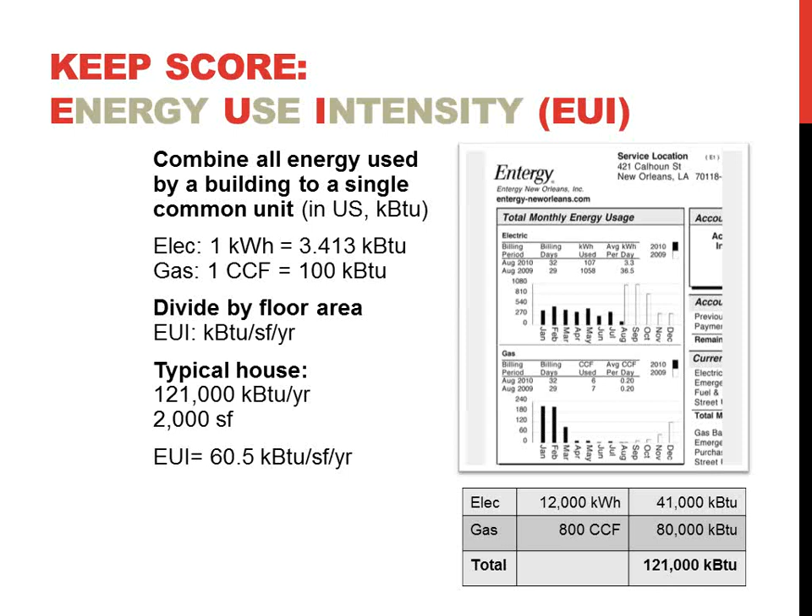Just to go over some scary numbers at the beginning: an EUI tries to find a way—if you have a house with an electric bill, the average American household uses 12,000 kilowatt hours of electricity and 800 CCF of gas—how do you talk about how much energy it uses in total? You convert gas to BTUs and electricity to BTUs, then divide by the floor area of a 2,000 square foot house, and you get 60 kilo-BTUs per square foot per year. That metric is the gold standard; it does violence to some of the subtleties of architecture, but it's a good way to keep track.

And this is the 2030 commitment that says we're going to take 2003 as our baseline, and whatever the average was of all from the government survey of, say, multifamily residential or single-family residential or offices, this is the average energy use per square foot.

This is nationwide. In some cases, when there's enough of that kind of building, you can slice it and dice it - so I just want to talk about buildings in the Northwest, or buildings in hot humid climates.

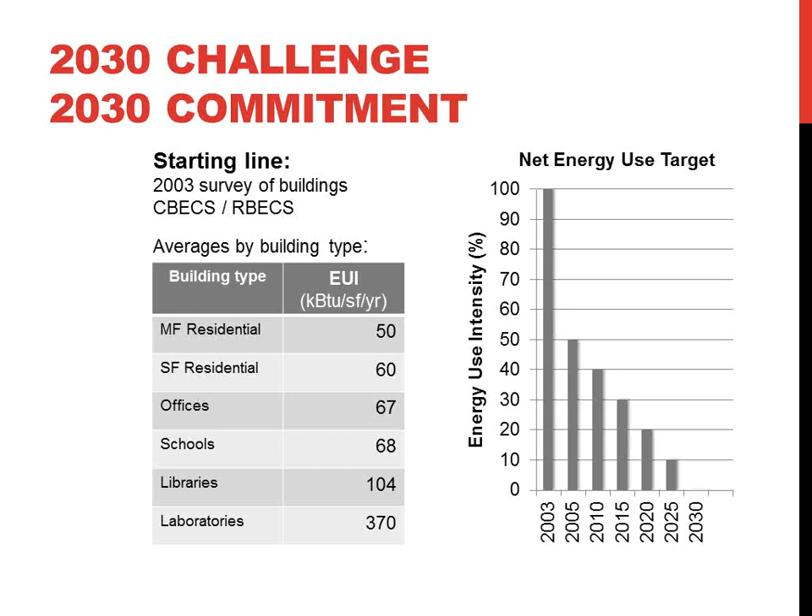When we look at a building that didn't perform as well as we hoped, we have to sort of say, and now we know why.

So how do we get there? Well, the recent budget battles go on unresolved in Washington, but we all know that if you're trying to balance, you can either raise revenue or cut spending. And the only ways to get to zero, to get into balance, is to do all of one or some of both, and so on. So the same thing's true, obviously, for buildings.

We can either make buildings more efficient, or we can generate more power. We can have a Hummer and cover it with solar panels, or we can try to make a building that's so tight on its energy use that it only needs 1 or 2 solar panels, and so on.

This is my own house. This is an 1880 shotgun Camelback, as the local folks call it. Camelback means it pops up on the second floor due to an eccentricity of the tax code where you were taxed by how many stories your building was at the street. So everybody built the second floor 30 feet back, and so the buildings have Camelbacks. Anyway, it's a 2,000 square foot, 4-bedroom house.

And when we moved in, we took data for a year, and we got a HERS rating, the Home Energy Rating System score. 100 means if you build to current building code with recommended levels of insulation, efficiency, and so on, you get a score of 100. Our house had a score of 188, and we spent $1,900 a year on utilities.

For a series of insulation and upgrading the heating and cooling system, which we did not to save energy, we did it entirely because the coldest winter I ever experienced was in New Orleans. I've lived in San Francisco, I've lived in Ashland, Wisconsin, I've lived in Canada, but the coldest winter I experienced was here, because we live in denial better than anybody else. We have to live where we live, right? So we're in denial that we ever have winter. So when it's 30 degrees out, people have these wussy heating systems that have no concept of how to actually make a place comfortable.

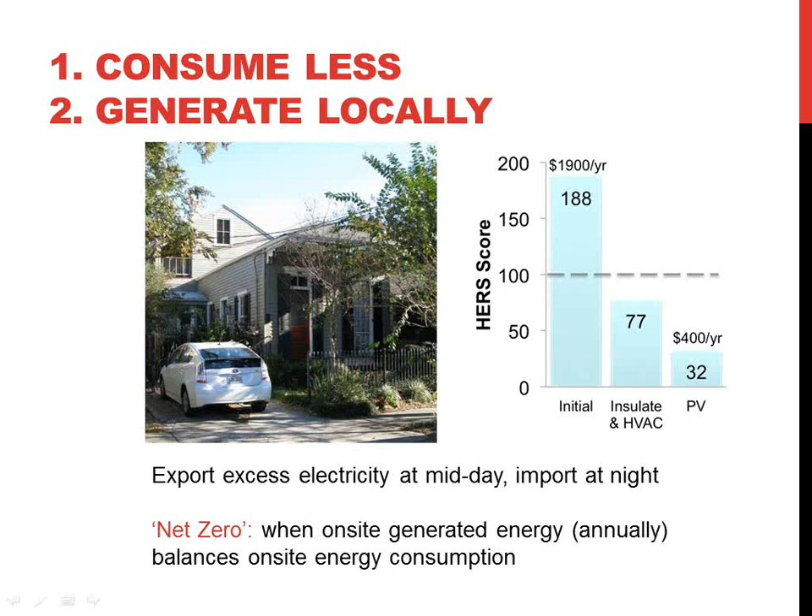And so that net is how we get towards net zero. True net zero is when those two things balance out.

If we say that a typical today's solar panel can generate in a year—you put a square foot solar panel on the roof of a building, it'll depend which one you bought and which angle it's at a little bit—but more or less, you'll collect about 30 kilowatt hours from that square foot of solar panel. Convert kilowatt hours into kBTUs, since that's the units we like to use for everything else. It's about 3.4 times that, so it's about 100 kBTU per square foot per year.

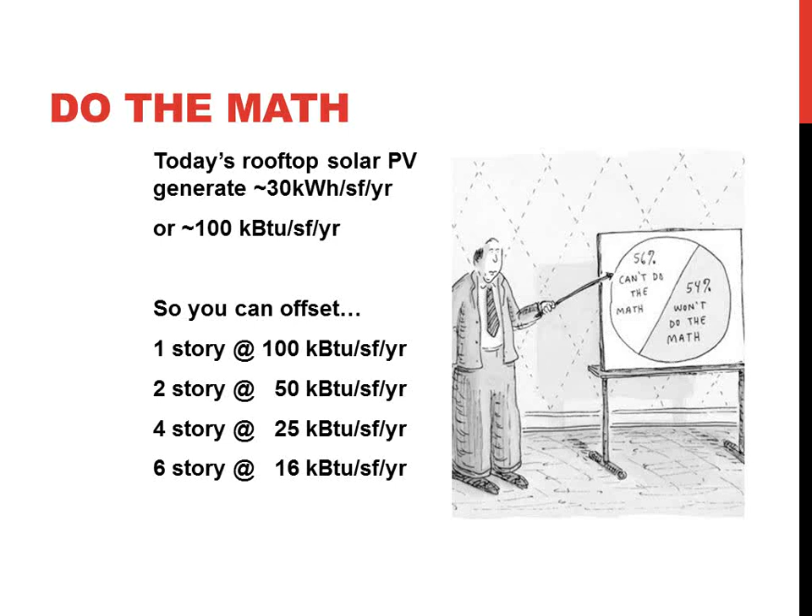Because in the end, the Bullitt Foundation made an interesting choice. This ground floor was supposed to be, of course, a Starbucks—it's Seattle, right, it's supposed to be a coffee shop. I'm sure it's actually going to be a little bit silly, I didn't know that they could grow coffee there, but it was going to be a cafe.

But the problem is the highest energy use per square foot of any building type tracked in the CBECS database is fast food retail, because of the intensity of all that stuff going on all day long. So they said, gee, if we put a cafe down here it's going to blow our energy budget, and we've run out of room for solar panels. So they said no, that's going to be office, because otherwise we can't get to net zero running all this stuff. And now, urbanistically, that ought to be a cafe, right?

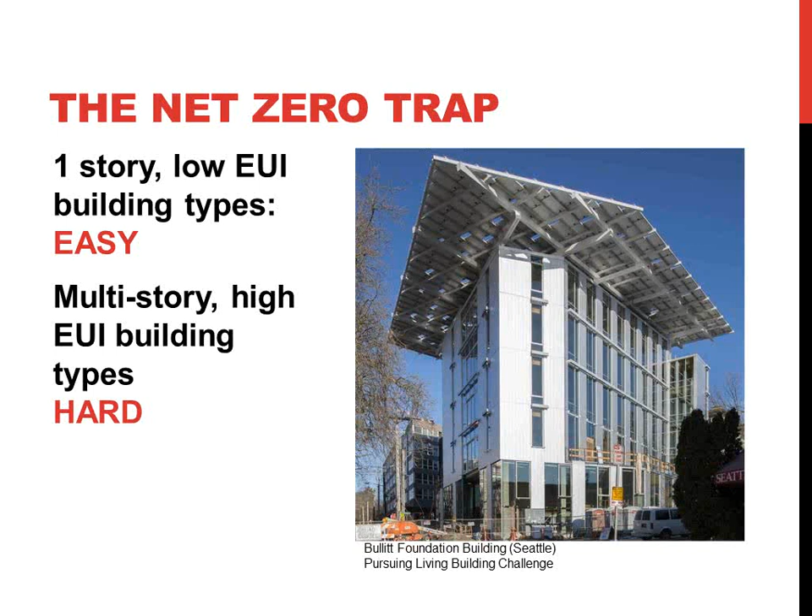So renewables, though, the good news is they're coming on strong. If I keep this track—there's this thing called the log law of learning.

If you take rats and stick them in a maze and time them, again and again, what happens is for every factor of 10 more times they've done it, or factor of 2, it's a logarithmic function. They keep learning, and what they progressively learn is less and less. You have to plot it on a log chart.

That's true not just of how rats learn mazes. It's also true of how we learn to do anything. Take the price of chicken eggs in constant dollars from 1920 to 2000 - it falls 2% per year. That comes from us learning how to be progressively less nice to our chickens, chicken batteries, but it's technology marching on, people figuring out how to squeeze out little bits of performance because learning happens. Learning happens in manufacturing.

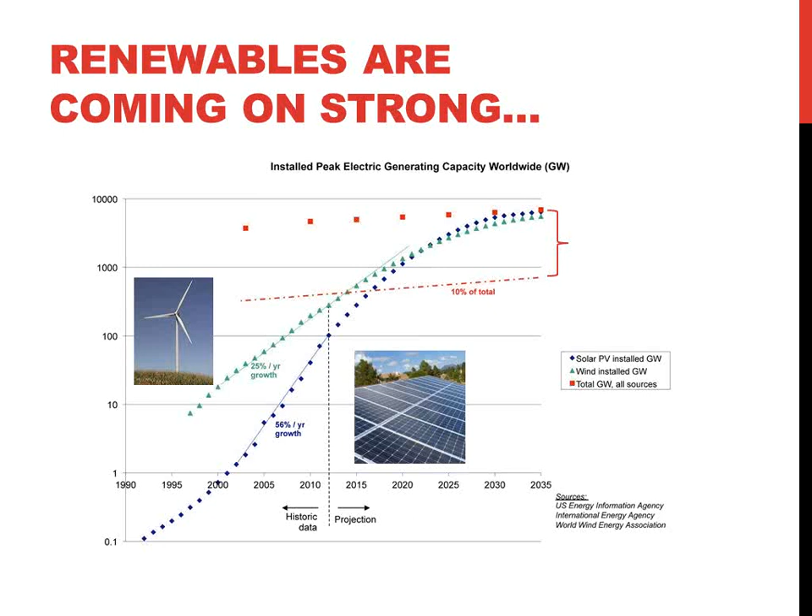The interesting thing is the technology at the end has nothing to do with the technology at the start. You can't predict which technology will win. You just know that someone will run in with their lab coat on and say, I have the breakthrough, and the little man will say, oh good, we were waiting for you. Here's where your next data point comes.

In my previous life I was a physicist, and I worked at RCA Labs on these amorphous solar cells. We got to the point where I did some thermodynamic calculations and said this technology is going to top out at about 15%. I wasn't sure I wanted to spend the next 30 years of my life in that lab, so I let someone else have that fun and went to do something else, which turned out to be architecture 2 years later. But the technology marches on - new technology is happening. There are now solar cells getting 44%, converting 44% of the sun's light into electricity. So there's amazing progress happening, but it does take decades.

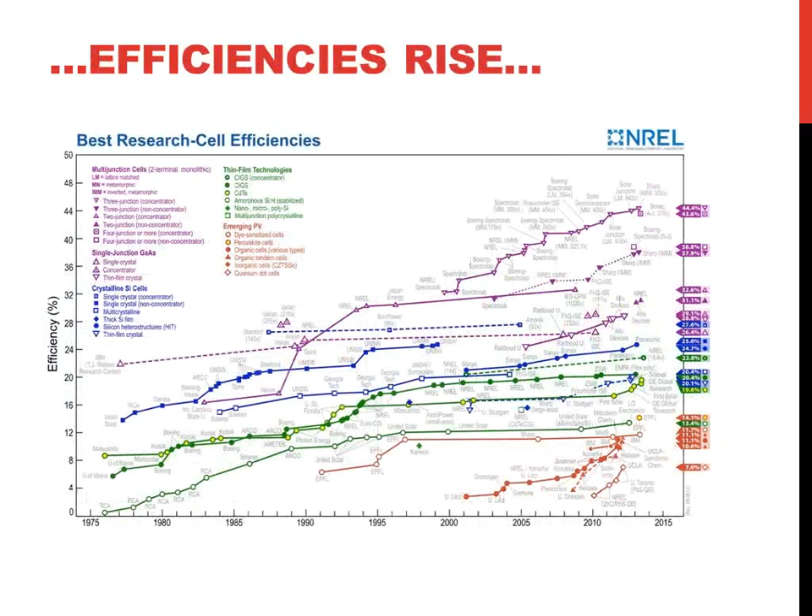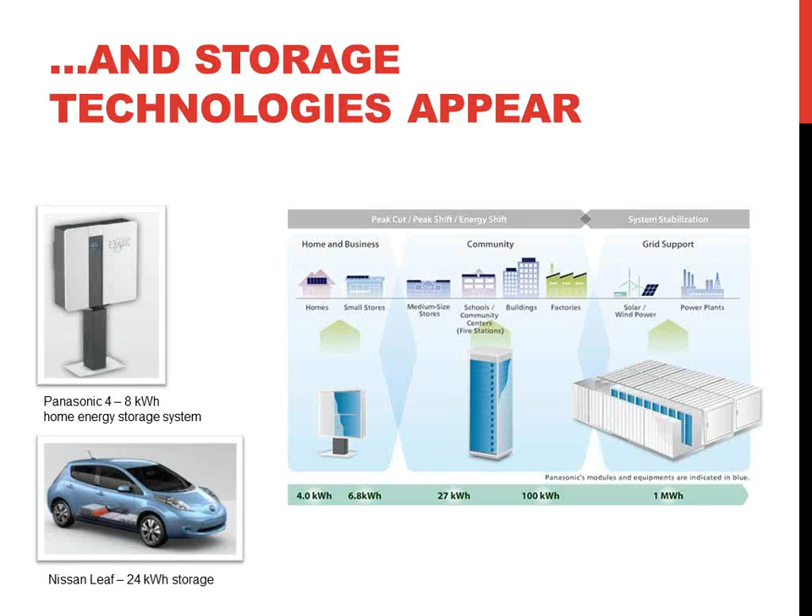Now Panasonic has started selling in Japan and in Germany. This is a little widget that sits in your utility closet, and it's a 4 to 8 kilowatt-hour electricity storage system. So this is a lot easier to scale, putting this in a lot of places. They're also building banks for power plants just to provide more grid stability. But as this system starts to mix with these solar panels, we're going to see some interesting things happen. Again, it's not about making it autonomous, it's about making it really smart here.

And so in some sense, as designers, what we're trying to move towards is this notion of: start out, yes, make it less bad, then yes, get to net zero. Well, we want projects to be regenerative. We want them to take a site and make it better than it was before we got it.

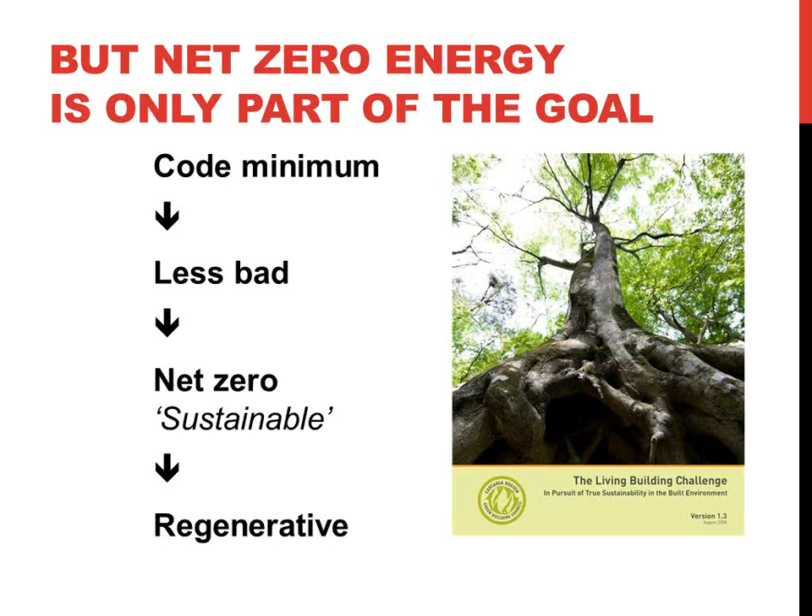More comment? Yeah, we're having a little bit of trouble on the webinar with the sound. Just stay in one place, in one area. Will that help? I move around a lot too when I talk, but okay. Right here? From here to this, is this the safe zone? That would be good. Okay, yeah, I'll be safe.

Okay, thank you. So with that setting, we're now ready for the main course, the research building, the Center for Interactive Research on Sustainability. So this project was first conceived by the director at UBC, Dr. John Robinson, in 2000. By the time the project had come to my hands in 2008, it was the third iteration.

The first two iterations, they tried to build a kind of consortium between 5 universities - some of them, you know what you do for a living. And the problem is they all had conflicting goals, and who's going to get credit, and what's going to happen, and all this stuff. And finally, the third time around, one of the major donors said, if you don't start building within a year, we're just pulling our chunk of change back out.

So they said, okay, we'll build it at the UBC campus. So it changed sites, and they gave the project to me. And they said, okay, this is all you have to do, Steve: it has to be a living lab that accelerates sustainability, it has to be a healthy place to work, it has to be net zero energy.

It has to be carbon negative in its operation, it has to have low carbon construction, be net zero water use, a net gain in landscaped area, not contain any toxic materials that are on a precautionary red list of things suspected of causing cancer - and you can't use any of those materials. And it can't cost any more than your budget - we've taken the average cost of construction at UBC for the last 5 years per square foot. That's your budget. This sounds great.

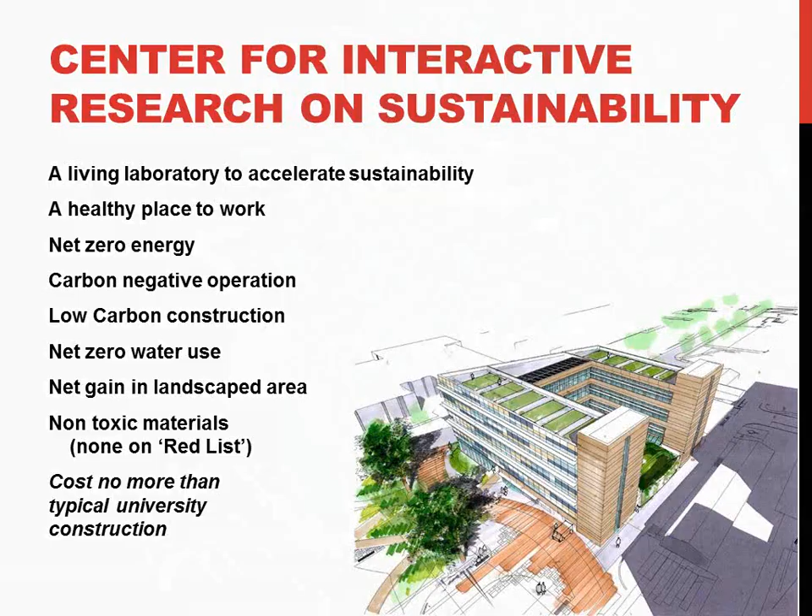I said, so what is this building used for? And they said, this is where whenever people are moving offices, is where we move the stuff. It's a swing space, and whenever people are vacating through renovations, they move stuff in here and move it back out. I said, well, where's that function going now that we're going to build our brand new shiny building on this side? And they said, oh, we're going to rent some space out in Paterson, which is like 25 miles away. We're just going to run a shuttle back and forth every morning. I said, I'm not sure that's quite consistent with our sustainability goals.

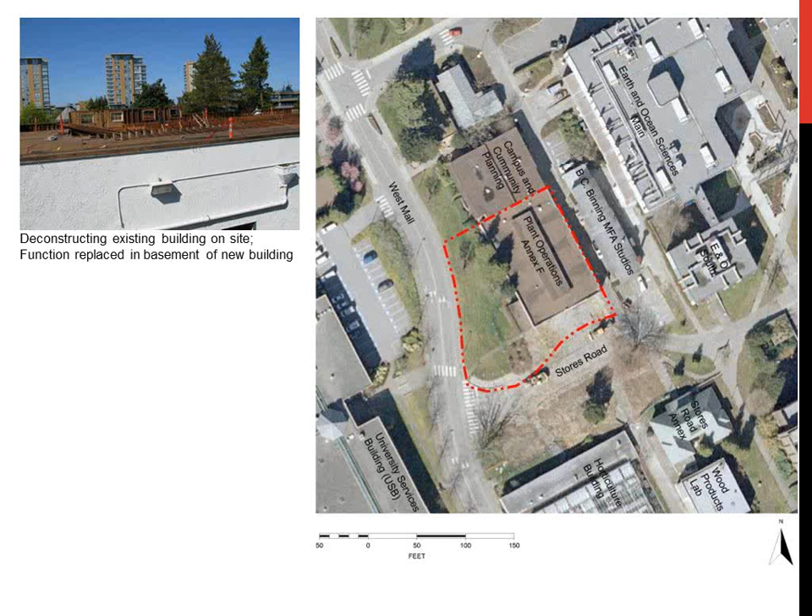So the first thing I did was try to convince them, do a series of studies to convince them to let us build a basement in this building, which basically replaced, because obviously stored desks do not need daylight or fresh air. So let's replace that function, drop it down. We disassemble this building board by board, and you'll see it show back up in the final building.

So this was the site. They have something we don't have in Louisiana - they have hills, and as much as you do sectional change, this is sort of a story and a half higher than here. This boulevard here is about 15, 20 feet below this boulevard up here, and this is the site of that warehouse. So we looked at what we could do, orienting the building, and so on. I'll go into that a little bit.

But we were told one of the challenges was somebody had poured a sidewalk. They said, here's your site, and you've got to put 60,000 square feet of program on this 15,000 square foot site. But actually, you don't get the whole site because there's this accessible path of travel for how you get up to the rest of the campus. This is wheelchair, this is a 5% slope, so you can't block that. And that's why the massing of the building has a foot, a little glass sliver that comes down to not block that accessible path of travel.

They said, this is terrible. I said, this is wonderful. Because what this will mean is that all the people heading up to their classes, not just people in wheelchairs, everybody took this path. We'll go right by, and this will be kind of our storefront of how we talk to the world. And then this thing, they said, well, is that where the Starbucks go? Because in the program there was a cafe. I said, no, that's where the sewage treatment plant goes. And they said, why? And I said, because then it will have to be beautiful. It's going to be the most beautiful, it's going to be the most prominent part of our building.

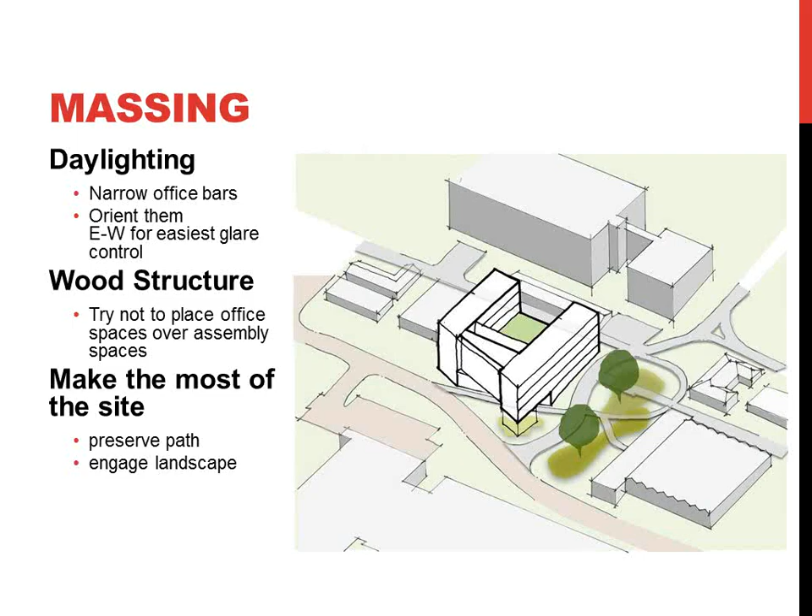So here's the floor plan. The main massing was to run, what we wanted to do was run the main massing east-west. We have a square site. You know, the easiest thing to learn in architecture, sustainable architecture 101 is, right? We want to make big, long, thin buildings that all run east to west, so all the glass is either north, where we don't have to worry about shading, or south, so a little overhang, and the summer sun can be blocked, and the winter sun can come in and keep the building warm. So that's, the problem is none of our clients give us sites that are like 500 feet long and 30 feet wide. So we have a square site.

So I said, okay, what we'll do is, this is a kind of a 1920s way of thinking about how building massing goes, so we'll make a courtyard building. They said, oh, one of the ways, just as the project started up, they said, to make the economics go, the university had just acquired some money to build a 500-seat lecture theater somewhere on campus. And we decided it will be what anchors your funding for your building, for your net-zero building. You're going to have a 500-seat lecture theater that is going to run all day long, and it has to have a cafe and washroom facilities for 500 students changing every hour and a half. Great opportunity. Exactly. I did not complain, but I said, great, this is good.

So what we did was we ran the massing running east-west so that we get the north-south glazing and shading and so on.

We have a 500-seat lecture theater. We're built on a hillside, so that's good because we have accessible wheelchair access here, or folks in wheelchairs can sit either at the back or at the front or the middle and end up wherever they like. This is the sewage treatment plant. And then this is the kind of court, the main entry lobby that wraps itself up and becomes the commons for the building.

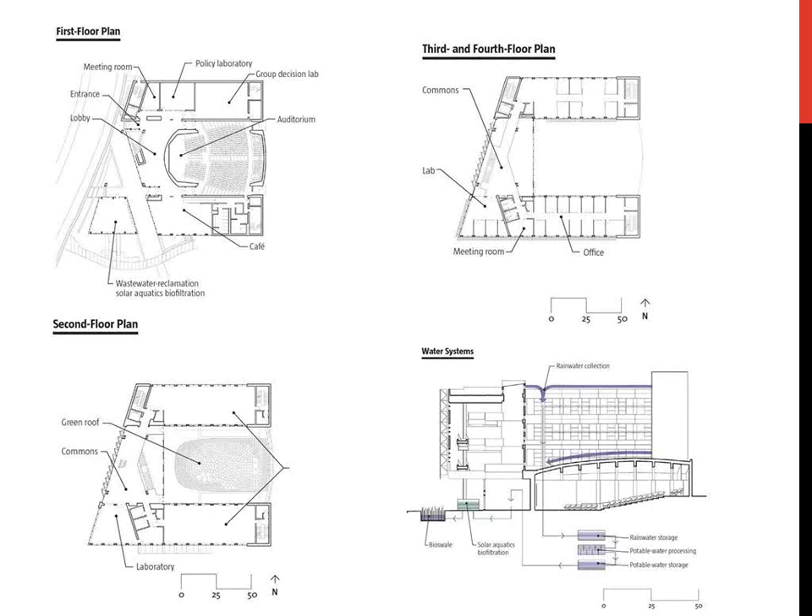But one of the things I'm pleased with in how the building turned out is the relationship between public spaces and green spaces. So everybody likes to have green roofs. There's a very famous one, the Vancouver Public Library has this very famous green roof that nobody who visits can see, because they don't want people up on the roof jumping off or whatever in the middle of downtown.

So what I said was, let's put the green roof down here where everybody can see it. It's the lid on the auditorium. And we'll use the high roof for doing what roofs can do where we don't want people there, which is collect rainwater for drinking and collect solar energy.

And then there's this notion of how water works through the site. This street that wraps by was called Sustainability Street, which had a whole bunch of examples of novel technologies approaching dealing with rainwater and so on. But the idea was that wherever you were in the building, you were reconnected to habitat.

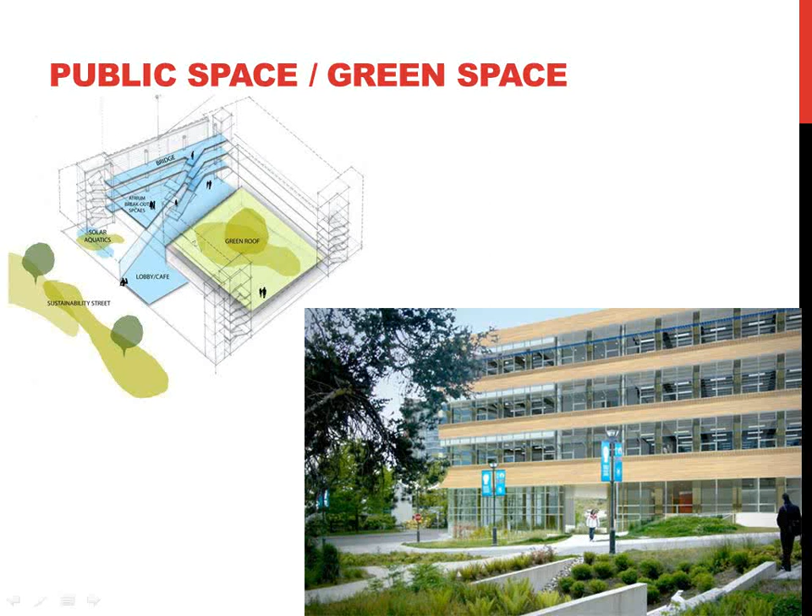So this is the world's strangest, this is the landscape architecture way of drawing the building - this is all the things that could have green in them, superimposed as if they were in one plane. Up on the high roof there were plots laid out for people doing green roof studies, although most of these have not yet been implemented - only one or two.

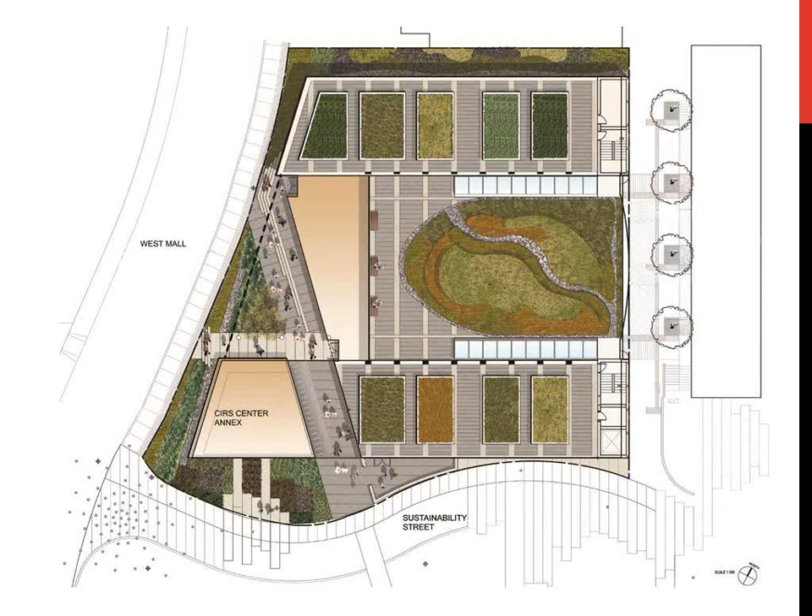Mostly we're using the main roof, which is a sort of U-shape for rainwater collection. This is the green roof here, over the main auditorium. And this is the sort of at-grade landscaping. You can see that a little more clearly here in this - kind of the Revit model on steroids - showing you the building, again the auditorium, the commons area for informal meetings, and the sewage treatment plant.

This is called solar aquatics biofiltration. It's a system using technology borrowed from cruise ships, which can actually treat their waste. The final stage of the material is usually enhanced with nutrients and dumped in the ocean - it's just natural, excess phosphorus and potassium and so on. But you can use plants floating in that water to do the final water polishing stage. And so that's happening here.

What we do is the system is designed to capture the rainwater. It gets filtered and processed, suitable for drinking. But all of the wastewater from toilets and so on gets processed, and that is what goes back into refilling the toilets. So we didn't have to make low-flow toilets because we have so much water in this building. The main demand for water is the primary, good water used in the cafe.

This is sort of interesting. When the diagram first came back from the engineer, I said, I like the diagram, but there's one mistake - you've got this arrow to the city sewer system going both directions. Can you explain that to me? And they explained you needed it for when the system was shut down, and also when the building was first opening, you needed to tie into the passing campus sewer line and flush things into there.

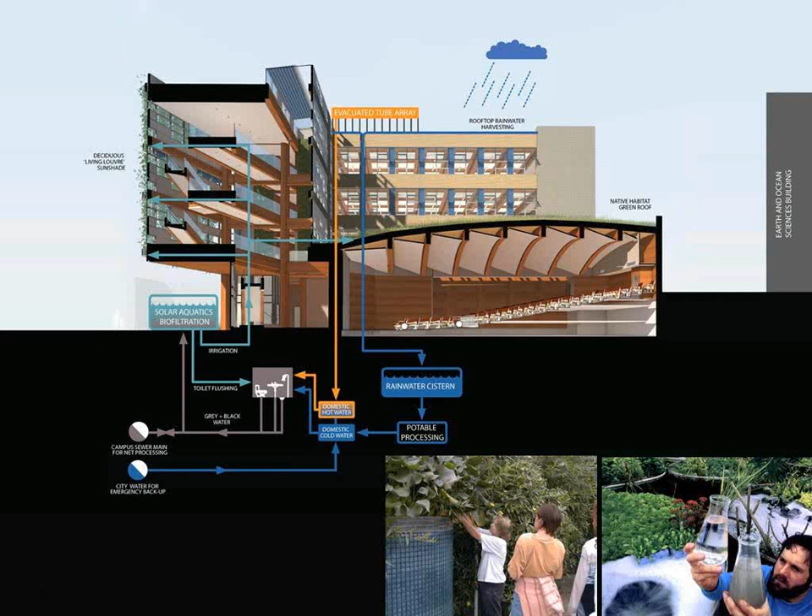They said the problem is that UBC shuts down for up to 6 weeks in the summer, and we don't want the little beasties that do all the digesting of the wastewater to die for lack of food. So we actually need to be able to draw sewage into the system and process it to keep the microorganisms happy and alive.

So this is that green roof. It's an intensive one—18 inches thick soil floating on top, so we can plant all kinds of habitat on here.

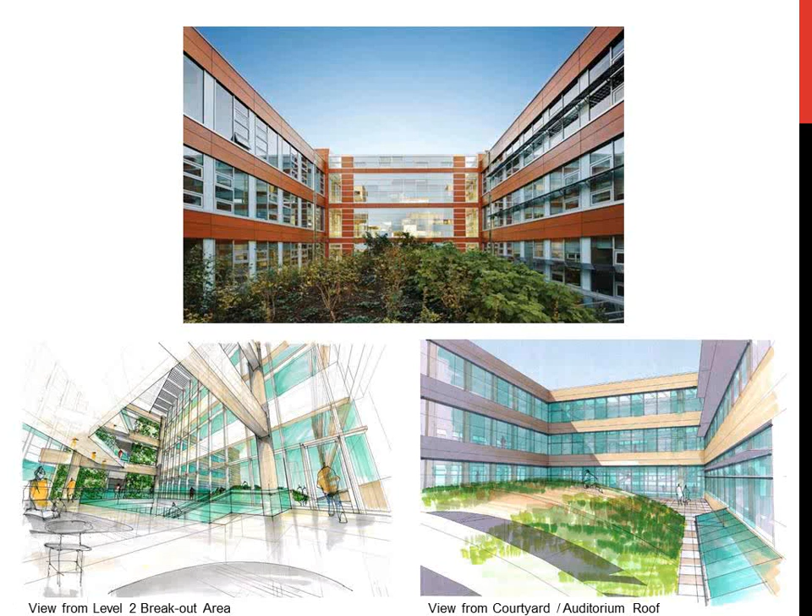And then we have these ribbons of skylights that wash natural light into even the auditorium, which is naturally lit by wall washing on the sides there. And the structural system is interesting.

So I attended a workshop where Peter Busby was, flying internationally around, and we're getting on a little bus to head back to the airport. I'm going one way and he's going the other, and he says, make it all out of wood. Then the door closes. And I said, no wait, this is a four-story building, we can't do this. Well, so I got to learn how to mill, and now increasingly the building works in this direction.

This is a 4-story building that is entirely wood frame. It's a glulam moment frame building. If you think of building a steel moment frame building, we now build it out of glulams for both columns and those east-west bars, which are 10 meters, 30 feet wide. So we just have 30-foot glulams running this way. They tie into the vertical glulams, which act as columns. Then there's basically a 4x8 sheet of plywood making a skin box, which is the shear wall.

Now the floor slabs, these things are spaced 10 feet apart, are just 2x4s, end on, nailed together. So the floor slabs are only 3.5 inches thick.

So the odd thing about this structure, as the code consultant informed me, is that when you build a steel frame building, it's not fireproof until you fireproof it—you do the spray fireproofing during construction, and if there were to be a fire during that time, you have a problem. This building is fireproof from the day they have the frame up, because a heavy wood building fireproofs itself with char. The wood will only burn in half an inch, and then it's coated with that char, insulating thickness of carbon, and it won't burn anything further.

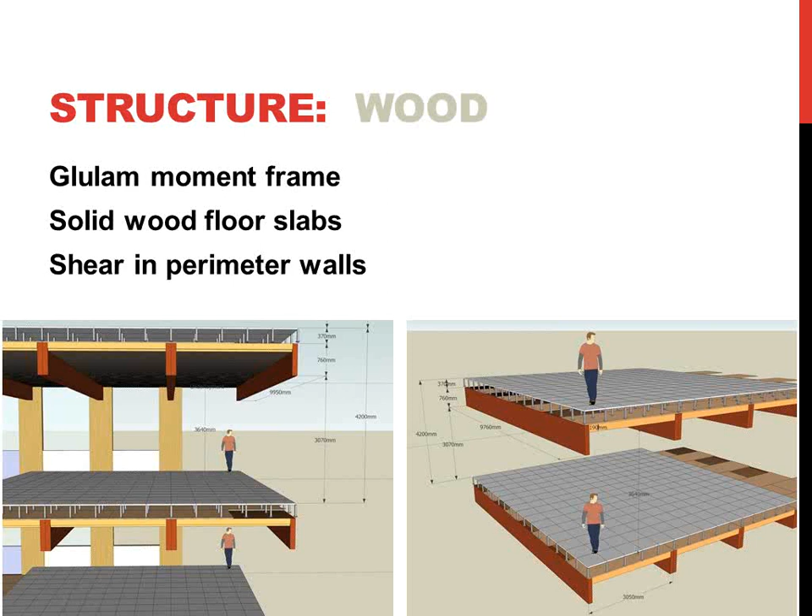But then, of course, the question is how do you run air systems if they're going to run along the bars? The answer is a raised floor system. We worked with Haworth, a donor to the project, who sold us a raised floor system at cost. The only thermal mass in the system is that these raised floor tiles, instead of just being carpet, are actually an inch of concrete, which gives us a little bit of thermal mass information.

Another reason wood matters a lot in British Columbia is pine beetle, which I'm assuming you have issues with here in Idaho as well. This is the map from 2006 of how many acres had been killed from pine beetle die-off. So there's all this wood that's mostly cosmetically damaged, waiting to be used, and if we don't use it, it will go up in fire.

So in some sense, the act of building with wood, given this reality, is an act of carbon sequestration. We're taking something that will either burn and go back into the atmosphere, and instead we're encasing it and holding it as a long-life building.

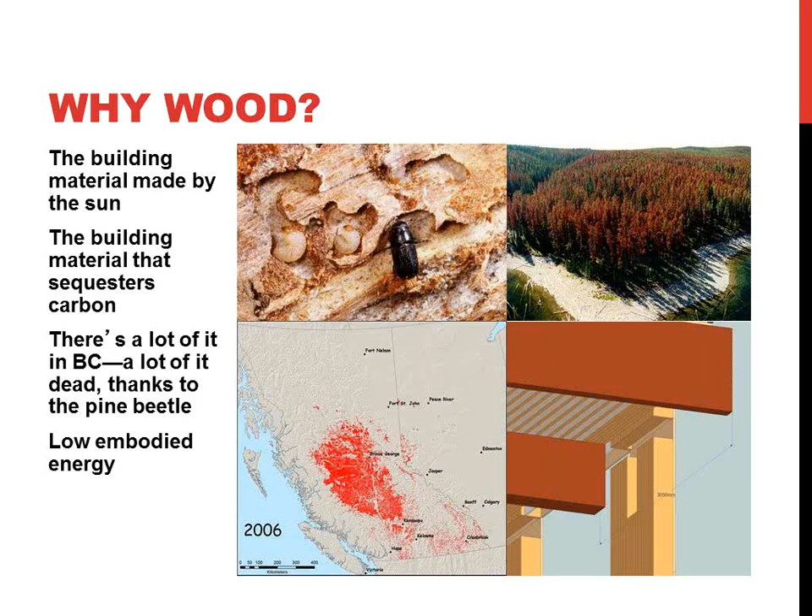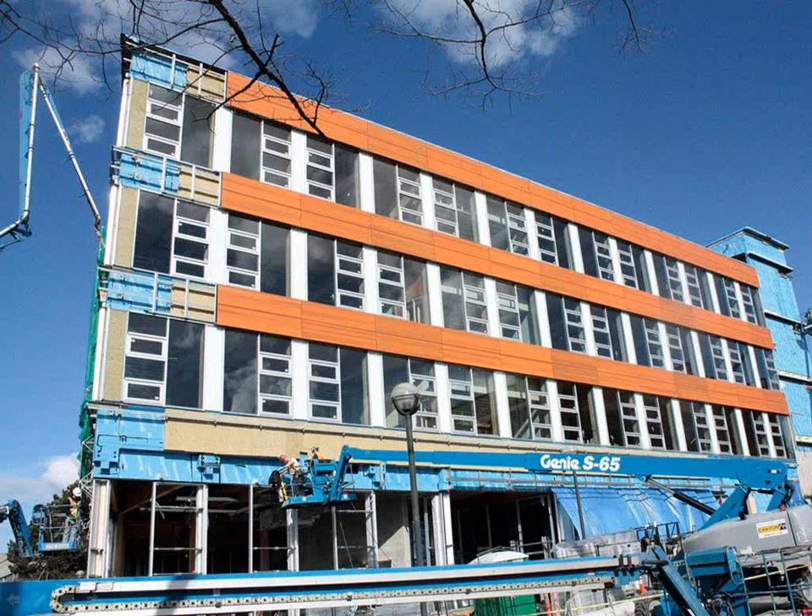This is it under construction, and you can see the system—all of the insulation is outside of the structure, so that it minimizes thermal bridging.

So that's Roxul, that's waste product from power plants and steel mills, spun into an orange pad. And then there's a frame, and this is a new product developed by the BC forestry people. It's red cedar put into a cross-lam panel and then sealed in a marine varnish, which makes it really durable.

I got off the airport and stepped outside, and you have this amazing parking structure painted this bright orange. The building's a bit orange, I have to confess, but you can see the waterproofing layer, the insulation, then a rain screen, and then these wood panels. They're all clipped in so that at some point they will have to be refinished.

Early on, we have parts of the UBC campus. This part gets a special kind of precast concrete brick made locally. But for this part, we wanted to use wood.

We had this long debate about what a sustainable cladding is for a building. They said, well, obviously it's got to be brick or concrete. So I went around and took pictures of the concrete buildings, all the brutalist buildings on the UBC campus from the 60s, and a lot of them were failing -- all the joints where the beautiful precast panels were meeting each other. So I said, this is not a no-maintenance building. It's a building that hides your lack of maintenance until the galvanized clip fails.

Maybe part of sustainability is you have to make a commitment that 10, 15 years from now you pull these panels off, strip them, and reseal them. That's part of the act of doing it -- a different way to think about it. But universities are used to it; they can get a donor to pay for a project up front, though sometimes it's hard to get the donor to pay for maintenance. Still, it was an interesting discussion to have had.

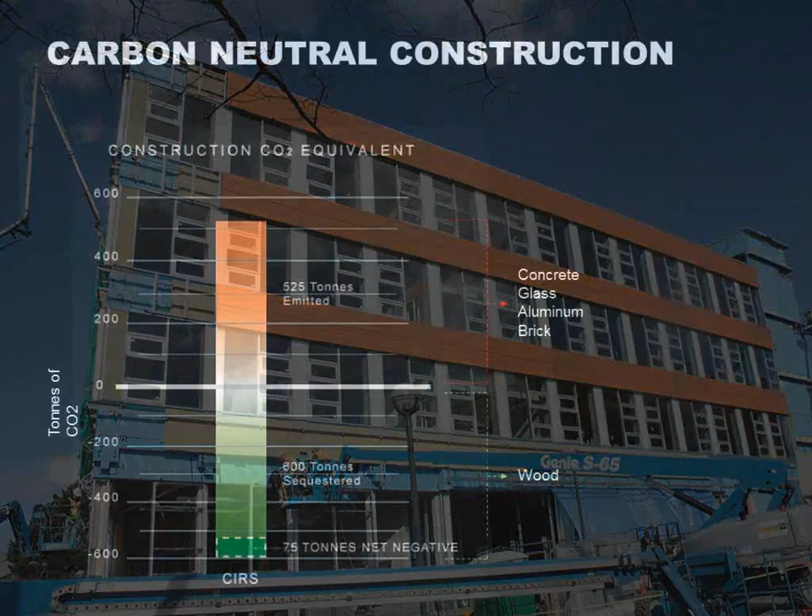If you do the accounting, assuming this building is going to stand for a long time -- whatever, a few hundred years -- this is the amount of CO2 that's sequestered in the wood structure, and this is the amount of CO2 that was emitted making the concrete, the glass, the aluminum, and the brick. And the accounting works out such that it's actually slightly carbon negative in its construction, if you do it this way.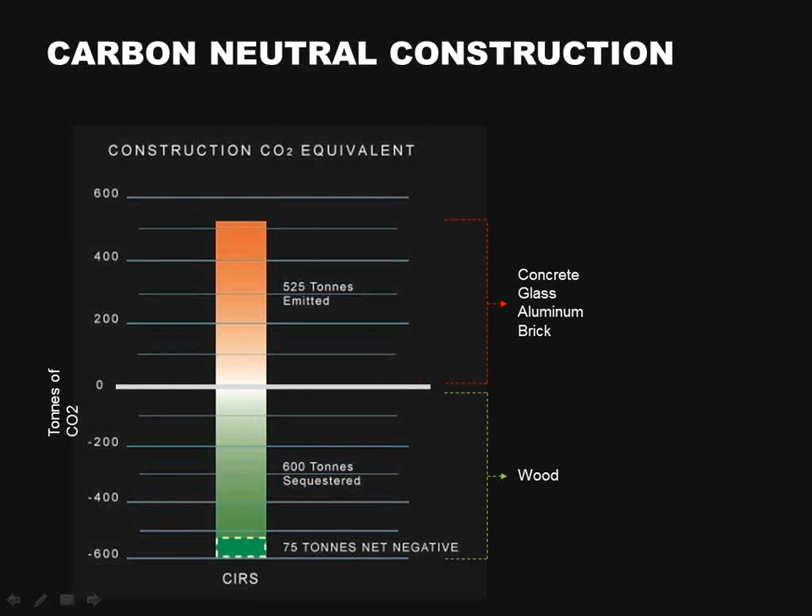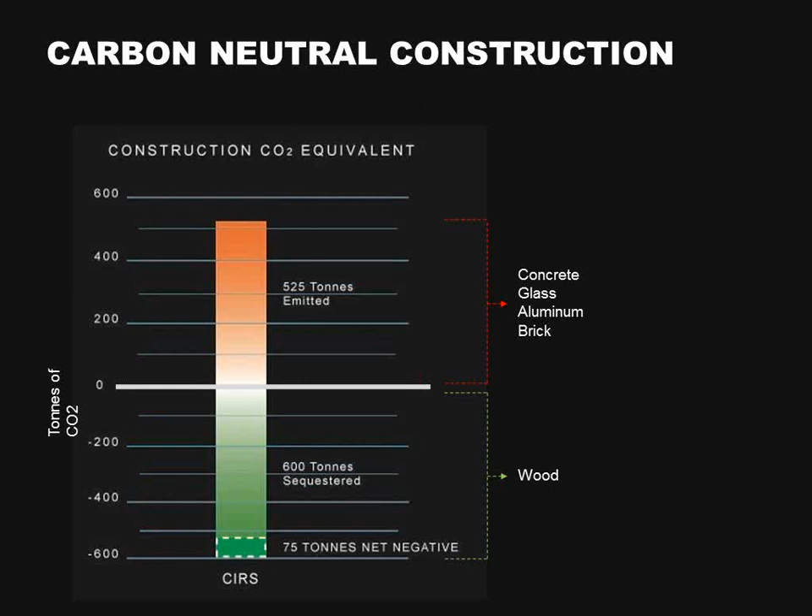The other way is, traditionally people just say wood has a low embodied energy -- you have to cut the things down and so on. But if we're making long-lived buildings, not houses that get knocked down in 50 years and burned, it's actually a form of carbon sequestration.

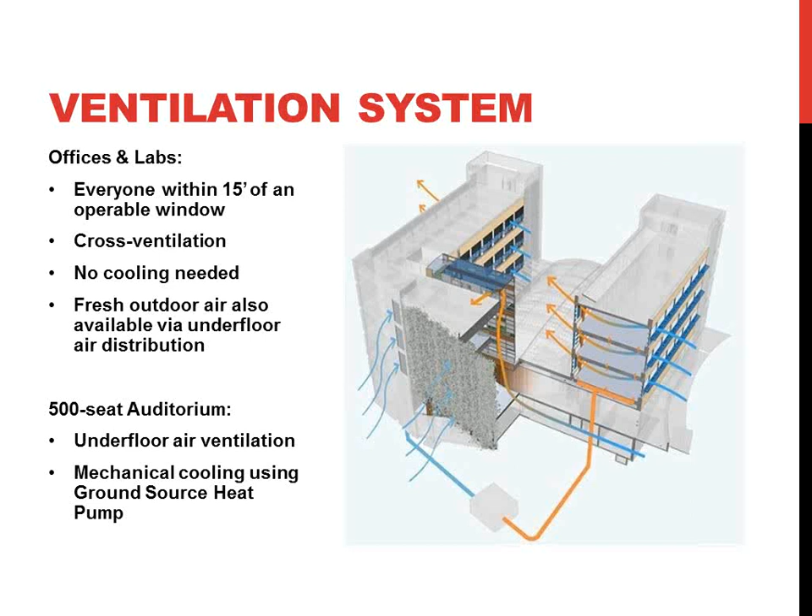The auditorium is air conditioned, because with 500 people in there working away, it can get pretty hot, so that system is air conditioned through a ground source heat pump. But all of the main laboratory and office spaces -- these bars are 30 feet wide, so very easy for cross ventilation. There's still a system for when you seal off during very cold weather: you feed in fresh air through the underfloor air ventilation system.

The west facade was kind of tricky -- the architects and the design heads really wanted an all-glass facade. I said, can we compromise? So what we came up with was a strategy of an active shade, where the activeness comes not from moving parts, but from living systems.

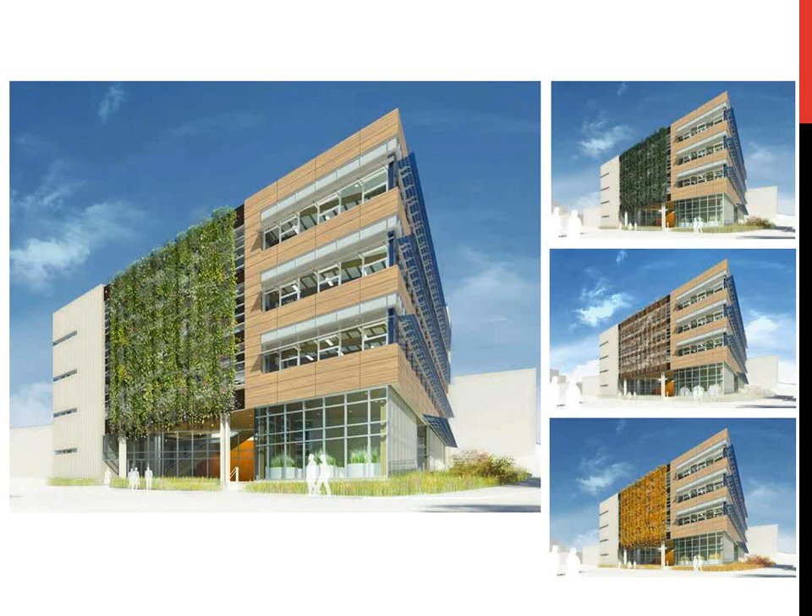At each story level there's basically a huge planter, set up with lines for vines to climb. The theory is that as it grows in, you end up with a system that in wintertime lets the light through, and in summertime blocks it to prevent overheating.

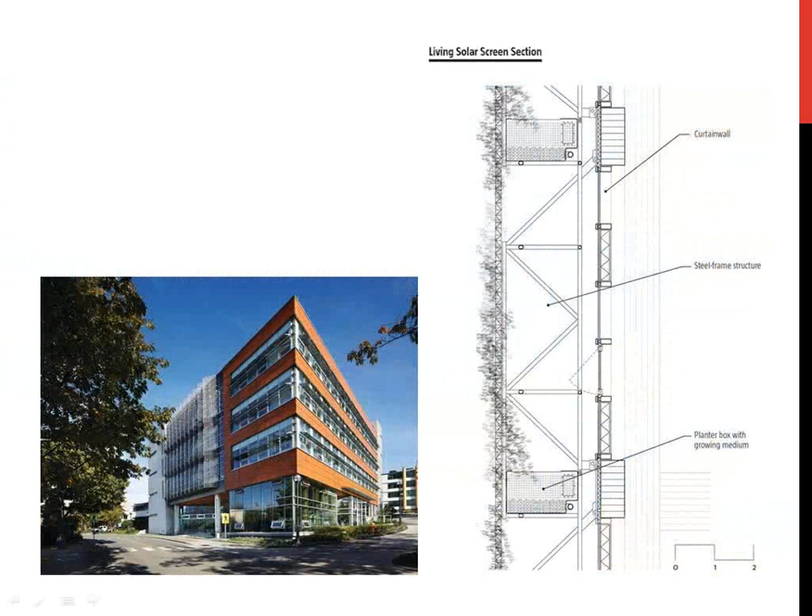There is some active solar, but I want to go into this -- this is why I set up the talk with the discussion about how much solar can take you, especially in the Pacific Northwest. The energy model said the whole building annually, given its lecture theater, its cafe, and all that, would use about 500 megawatt hours per year of electricity.

You can do a quick calculation using a simulator and say, if we just have a flat roof at this latitude, we'd basically have to cover the entire site with solar panels, like they did at the Bullitt Foundation.

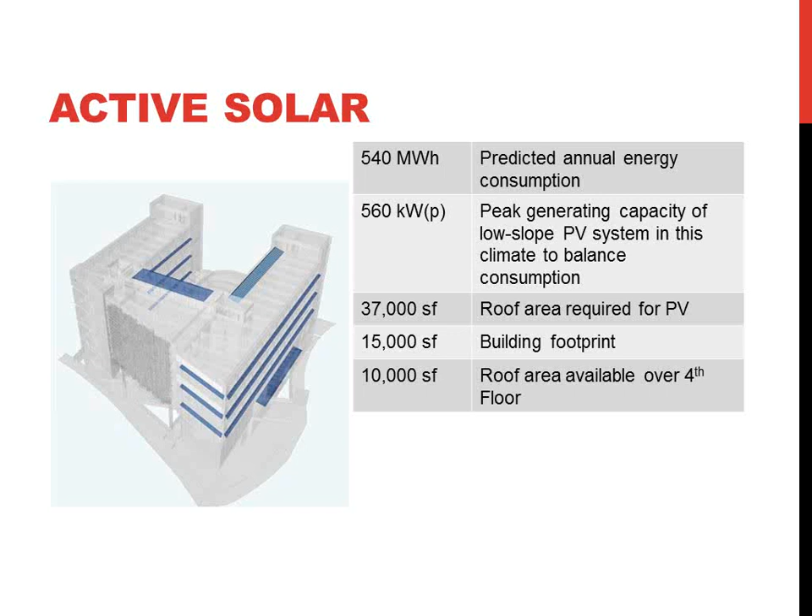What's the peak generating capacity of all those modules I'd need to make that much energy in a year? The answer is about 500 kilowatts peak power. That would take 37,000 square feet of solar panels. The only problem is the building footprint is only 15,000 square feet. And given that we have a green roof, there's only about 9 or 10,000 square feet of roof area. So we said we can't get to net zero that way.

But we can at least use solar in an interesting way, getting double duty out of things. We needed to provide shade on these windows so winter sun can come in, but summer sun is blocked so it doesn't overheat. We had only budgeted for 25 kilowatts peak power, not 500. So we used that to make the solar shading device we were going to make anyway. Instead of making it out of aluminum, we made it out of solar panels. So the solar panel provides the shading, and we also generate power.

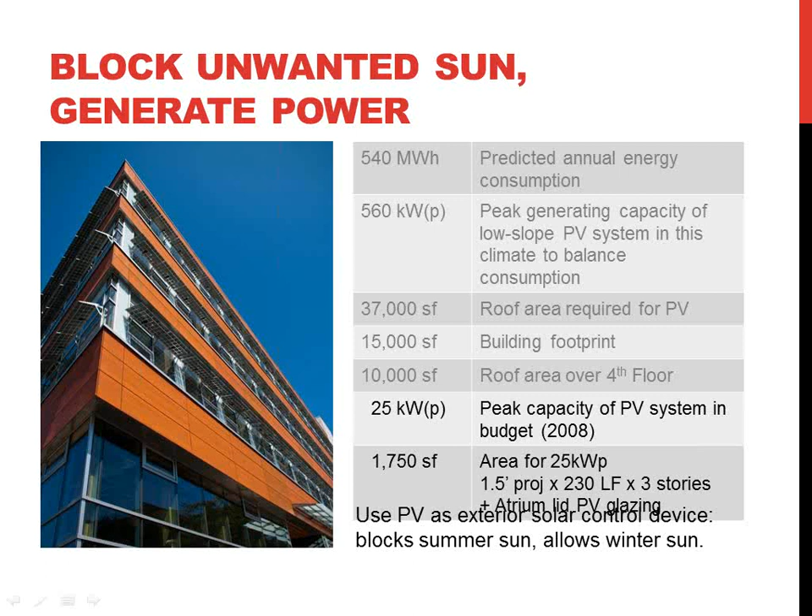Now, the scheme for how we'd get to net zero was kind of living off the land. We looked next door and I asked, what's that? They said, that's the Earth and Ocean Sciences building. That building has 28 fume hoods, all putting out 1,000 cubic feet per minute of fresh air, exhausting out. I said, they must have one hell of a heat recovery system on that. They said, why, no. We just redid the whole HVAC system on the roof and decided we didn't have the money to put on a heat recovery system. I said, we can solve that problem.

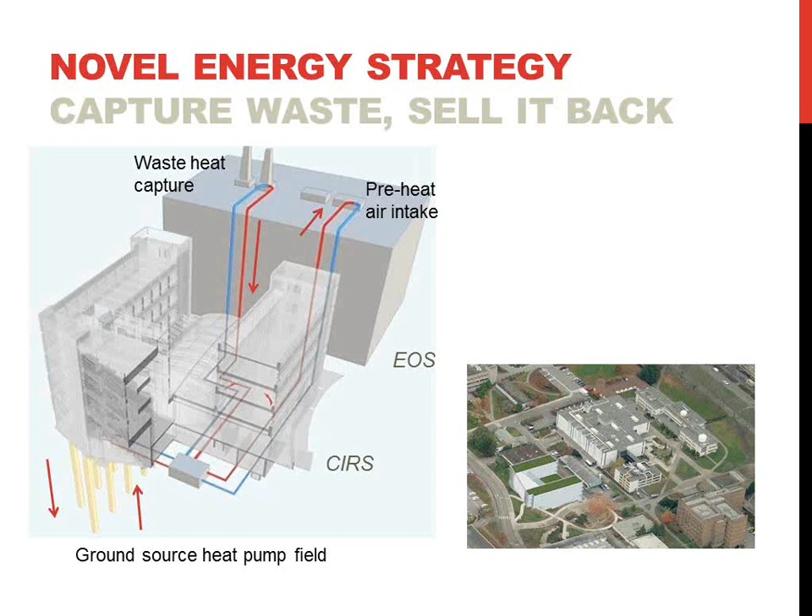So what we did was put a heat recovery system on the centralized exhaust for that building. We steal their waste heat, bring it into our building, and use it if we need it. If there's more than we need, we store it in a ground source field underneath our building, which we also need for cooling. Then, when they're ready, we pump the excess back to them into their air intake and preheat their air intake.

So the way this works is like stealing low-grade heat. We are an all-electric building. The heat is brought in and stored in the ground source field, and then handed back with preheating, which turns down the amount of natural gas the central plant has to consume.

If everything works as advertised, we'll use 530 megawatt hours a year of electricity, while the campus will use 640 megawatt hours per year less of natural gas. In BC, the electric mix is already over 90% carbon-free, mostly hydro, so we'll get all the heat we need out of it. The campus gets a 60,000 square foot new building, campus CO2 emissions drop by 70 tons per year, and campus energy consumption drops by about 100 megawatt hours per year.

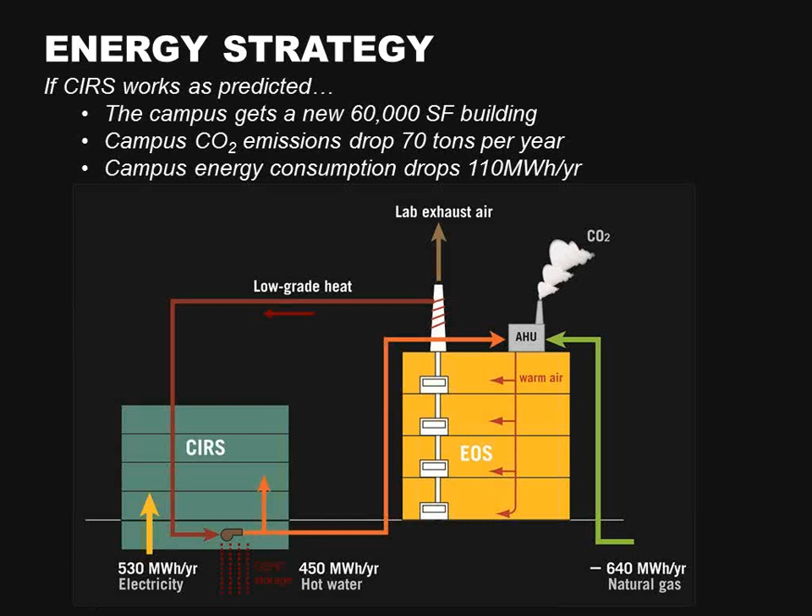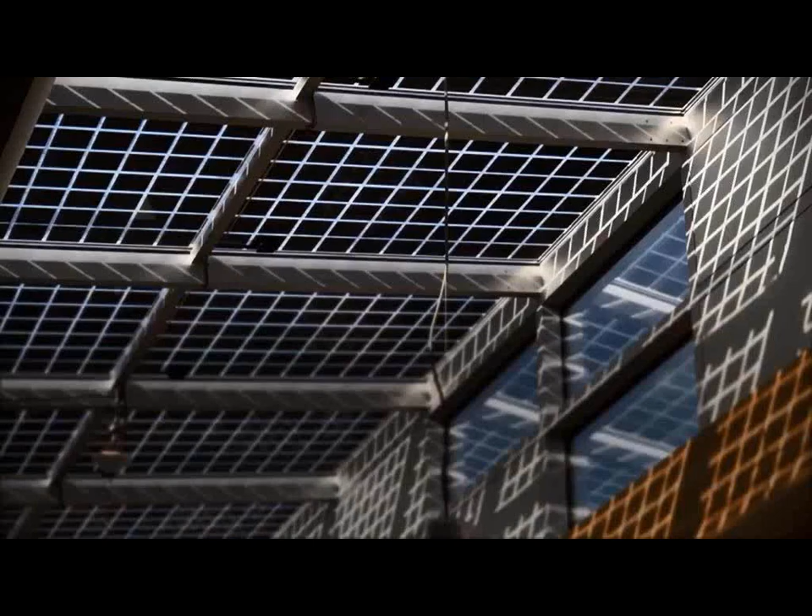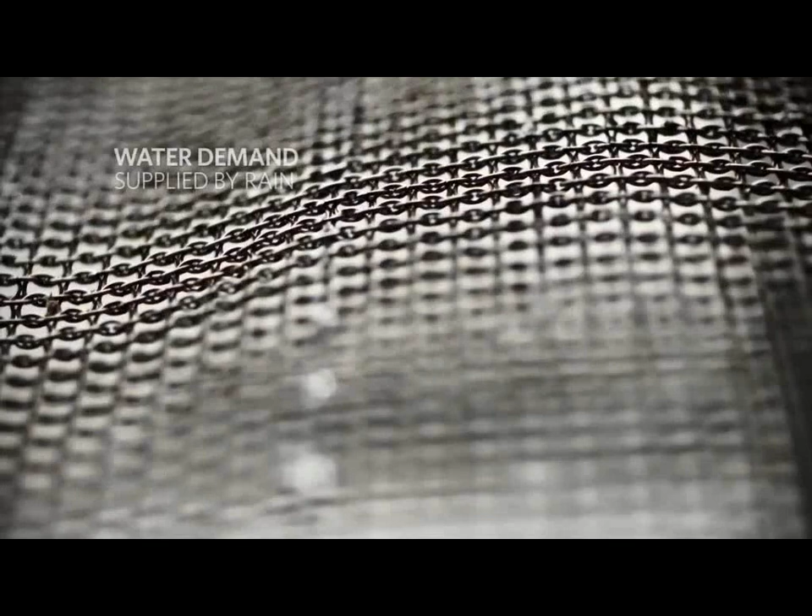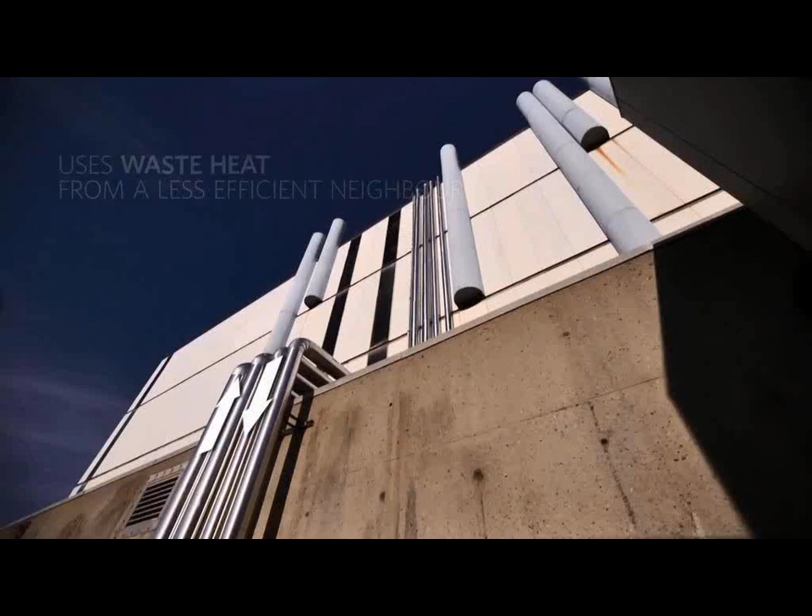Now, the multimedia component of this program—let's see if I can do this. Oh wait, no, just escape, and then Alt-Tab or something? Oh, I have to find where the mouse went. Oh there it is. Wait. There. Oh, okay, now to continue back, I Alt-Tab. Yep, oh, escape again. Yeah. Zoom—oh there we are. All goes well, from current slide. Very good. Oh yeah, yes, there it is. Good, okay, next.

So that was opening day, to release that video. I watched it remotely and shed a tear. Sensitive new age music. Over here.

It's been fully occupied for a little over a year now, and I spoke with the person who has been studying the building's performance. The good news, she said, is that she's been doing post-occupancy evaluations of buildings all over campus, and this building by far has the highest occupant satisfaction rating of any building they've ever measured. I felt very good about that. The occupants love the daylighting, the air quality, the operable windows, and they said they just love that it's beautiful.

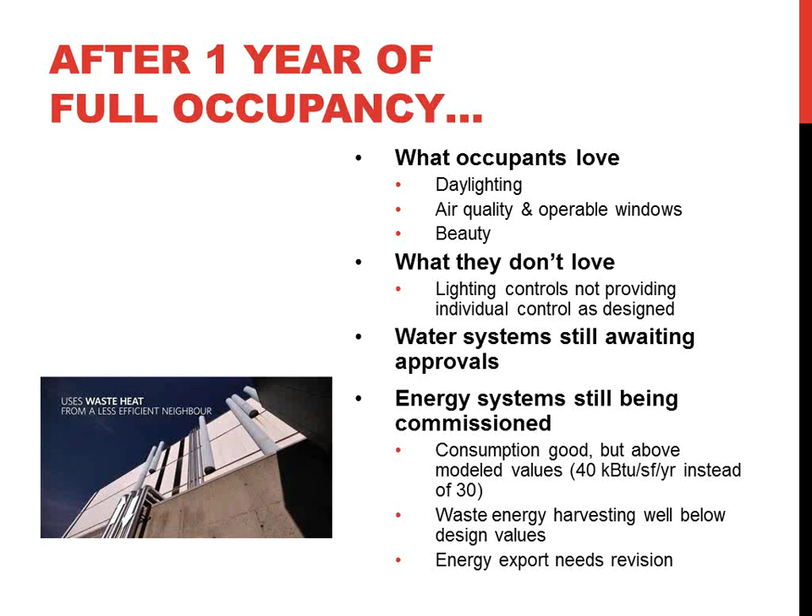And they need people who will champion that, and they're working on it. But it's hard because, like every project we work on, raising the money up front is a lot easier than raising money to go redo something. And that's why, as designers, we often pick conservative choices, because you know that money won't be there.

But they're on it, and they still do a lot. So this leads to the final third of the talk. What I want to talk about is what I think can apply from this kind of exemplary building—in a sense it's an example of both the good and bad of what it is to be out on the front edge, that applies to everyday work.

This is a study published by the New Buildings Institute, which you have a relationship with, I know. They studied 100 new buildings, published back in 2006 or 2007. They gathered all the computer models of how much energy per square foot the different buildings used, because these were all kinds of different buildings.

For those of you who forgot that part in college, the regression coefficient is the part that, if it's 1, means this thing is a perfect predictor of the outcome. If it's 0, the thing you're measuring has nothing to do with the outcome. 0.33 means that a third of the variation in observed energy performance is attributable to what the energy model said—meaning attributable to the design.

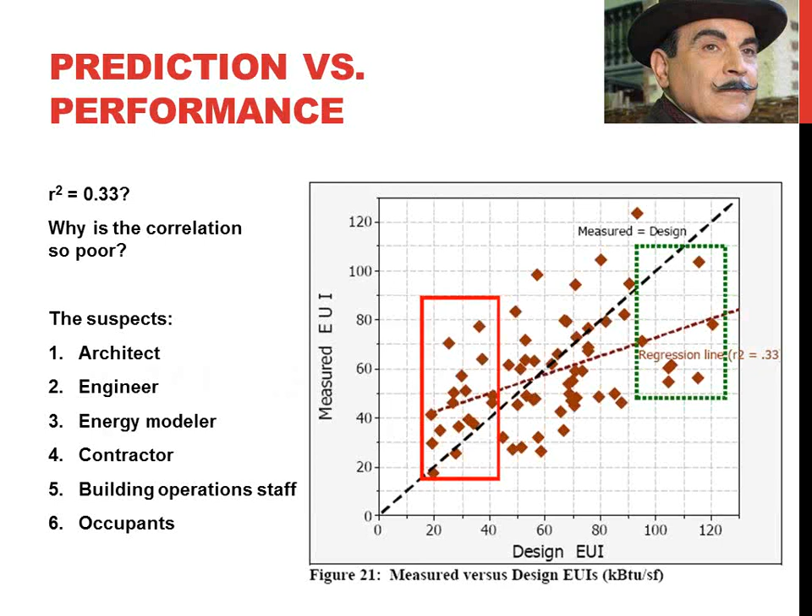Or it could be those pesky occupants being selfish, or trying to eat too much, or something like that. So these are all plausible suspects. Okay, so who's at fault?

When I first got to New Orleans, just finishing our contribution to Make It Right, the Brad Pitt neighborhood in the Lower Ninth Ward—a year or two later we were proud when our project was featured in Green Source magazine as the lowest energy user in the Lower Ninth Ward. We said, God, we are so smart, we are genius. In this case this was the electricity used, and that was the PV generated on top—they had a little bit of gas because it was an inline water heater and so on—but the EUI was 3, and the national average for single-family homes is 42.

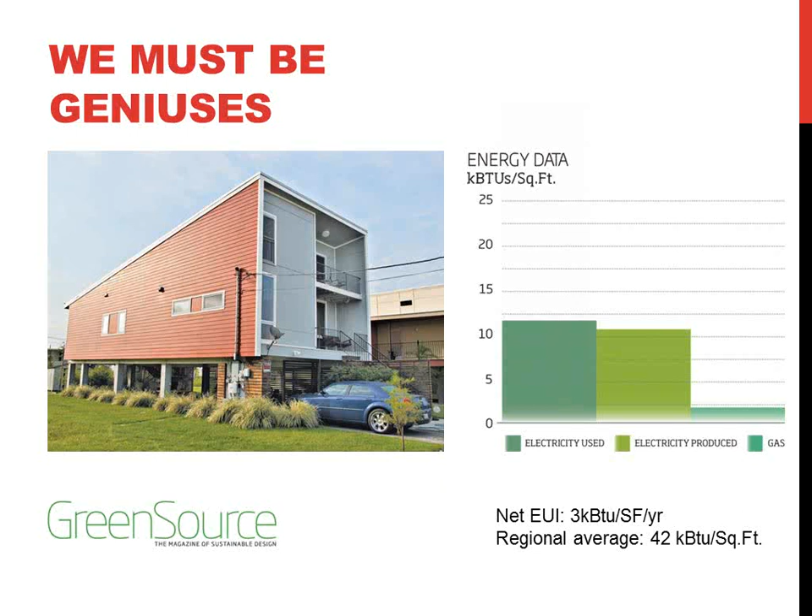We are genius. Then they built two more of the same house. And then we went and instrumented another one after the magazine report had come out, and it was 60 kBtu per square foot per year—the second highest energy user in the entire neighborhood. We must be idiots. But if we had built this one first... the building was different; it was the occupant, there were other things going on in the system.

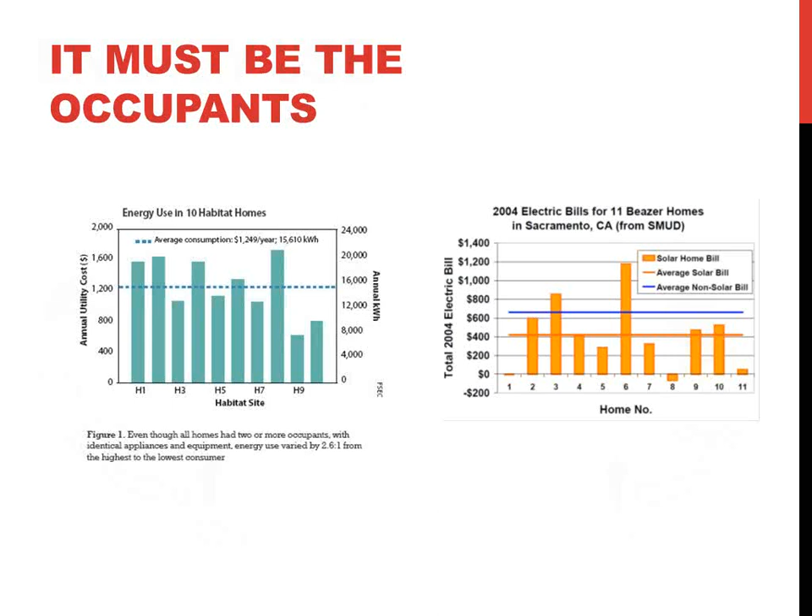So it must be those occupants, right? There are studies where they've done this: 10 identical homes built for Habitat for Humanity with solar panels on top, built in Sacramento by SMUD. These are the actual energy use measured. This one was a net-zero house, this one was not a very great house, and they were all the same house. So a lot of this comes down to occupant choices, obviously.

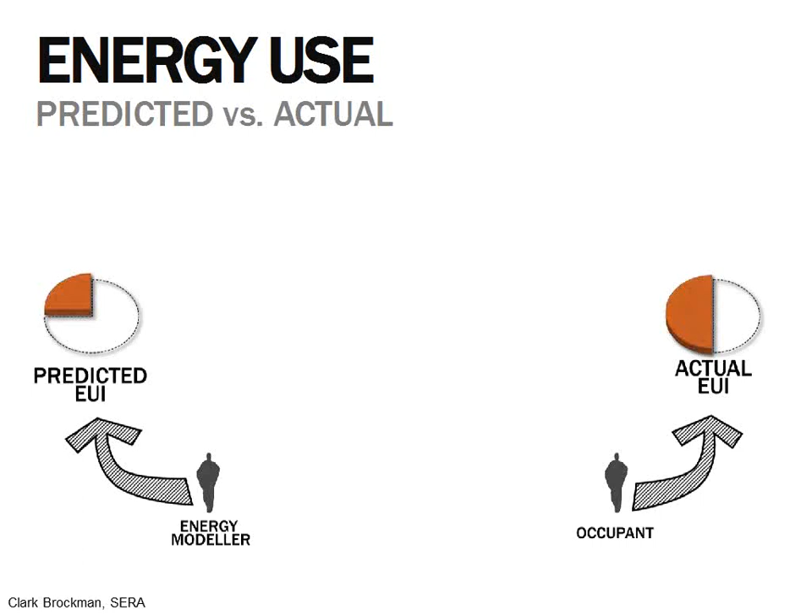Clark Brockman of SERA, who've done a lot of the building challenge projects, have a really great chart that I steal freely and recycle. He says there's this huge gap between what actually happens, the actual energy use of buildings, and what the energy modeler predicted. In between there's this chain: the modeler, the engineer, the architect, the owner, and so on. In theory they're all talking to each other, kind of playing phone.

In reality, they don't talk to each other all that much. Part of the problem is they all had a different idea of what was going on in their heads. So part of the challenge for the design team is trying to break that and get them to see the same thing.

We're talking about occupant choices, but sometimes it's the building operator or something about how the machinery was set up. This was Eskew+Dumez+Ripple's first LEED certified building, Dr. Nancy Foster of Florida Keys Environmental—it's a visitor center and research lab down in the Florida Keys. The day it opened, this is what the building would be if built code minimum, and this is what the computer model said. I haven't put in the month-to-month variation, but it was supposed to be about 20% below code.

Good on us—for the first two months it was doing okay. Then in the third month after the building opened, the building controls company came by and said, 'I have a brand new release of our software, let me install it for you.' As they installed the latest release of the building management software system, they overwrote the settings of everything in the system for the entire building.

So the owner contacted them and said, there's something a little weird, my energy bills just shot up—I'm using about twice what you guys said I should expect. They called up the commissioning agent and said, can you take a look at it? He says, I'm in Atlanta, they're in the Florida Keys. Listen, I'll come down on my own time, but I can't pay for my own air ticket—can you just buy me the $300 air ticket to come down from Atlanta?

And the guy said, I'm a government agency, I don't have a budget for that, so I can't pay $300 to bring you down. So instead, they ran like this for a year, and then the building operator looked at his budget and found he had services through an IDIQ contract—an indefinite delivery indefinite quantity contract—with a local energy modeler, a local energy consultant. He came by and said, these guys don't know what they're doing, let me change all the settings for you. That was when the mold bloom occurred.

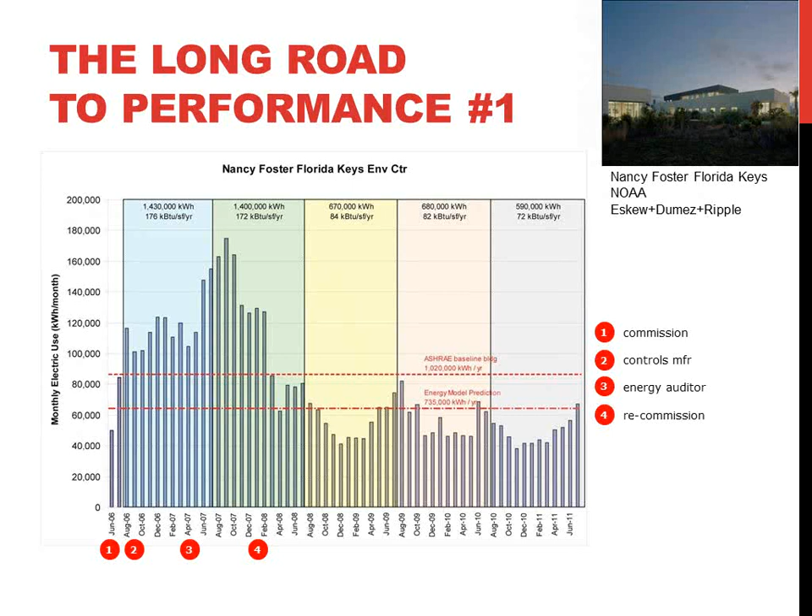Normally, as architects, we just get the photographs—and before the messy people get in to mess up our photographs, we're long gone.

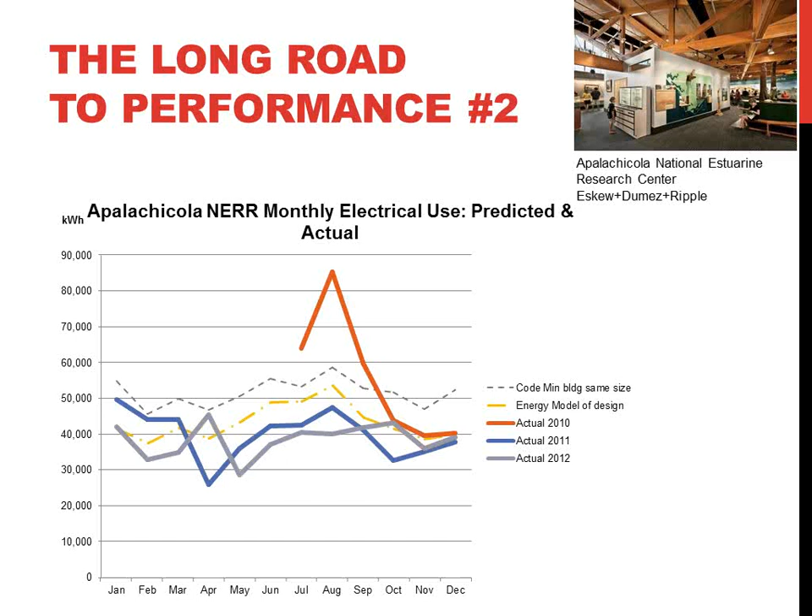And that's part of the problem when we work with these high-performing buildings: the incentive structures in our clients' organizations need to be set up so that it's in everybody's interest. The guy who took extra time to get this building working right didn't get a bonus. That's wrong. He should.

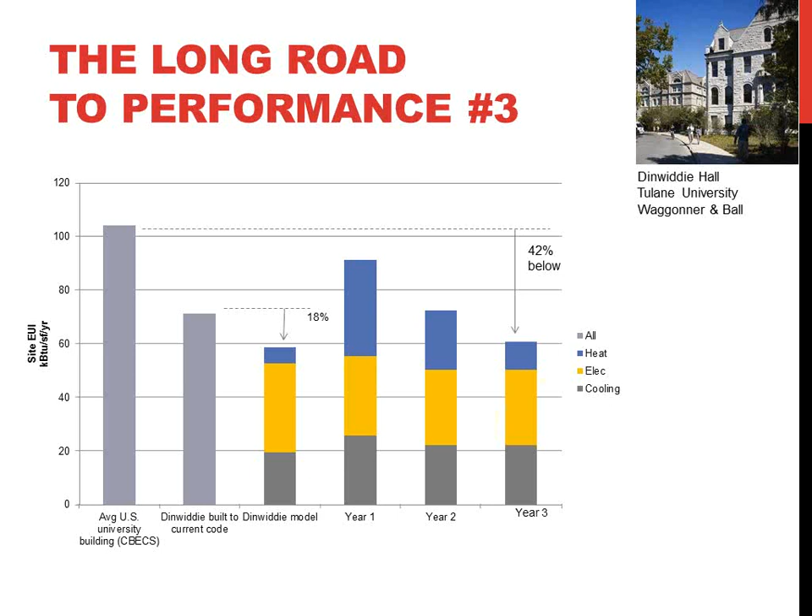So we're now starting to get huge quantities of data thanks to the then-Mayor Bloomberg, passing Local Law 84, where every building over 50,000 square feet in New York City has to report its actual energy use. So you can actually look up online the energy use of the Empire State Building, or find the addresses of other buildings. And this has had a transformative effect in the New York City market.

I heard somebody once say—it was Oppenheimer—that the secret of the atomic bomb is that so much of the time we stop ourselves from trying because it's just not possible. But when we see that other people are doing it, we can get there.

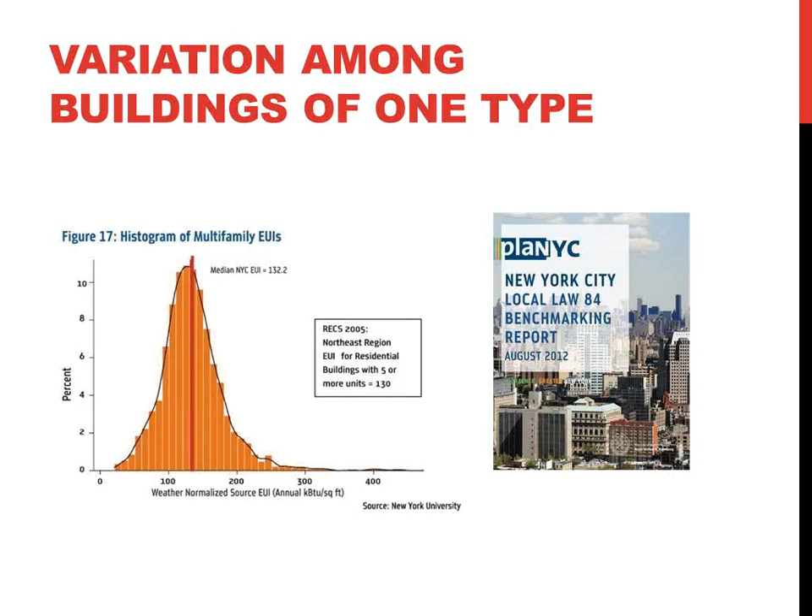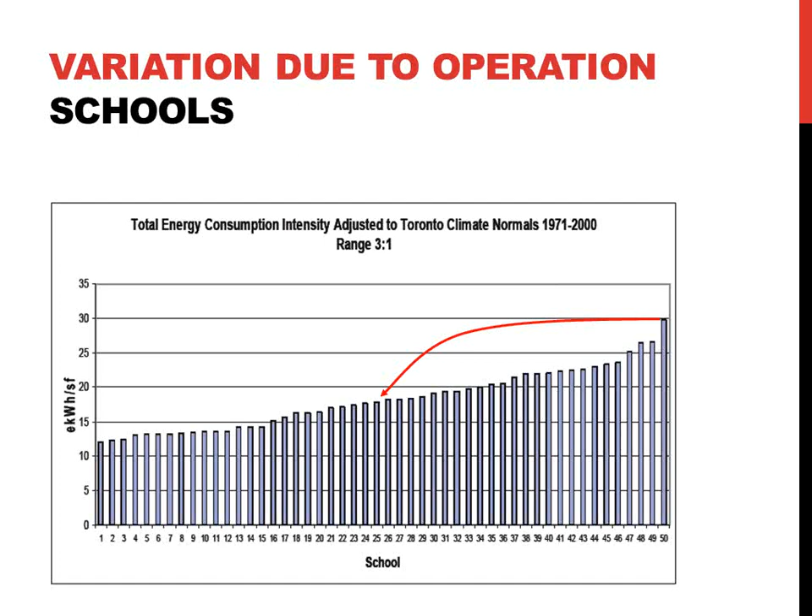Now, even within a single building type, you can see variations among occupants. You can always say a guy had 10 houses—well, maybe they were built by different crews. The crew that built house number 10 in that study was drinking that day. That's why that building doesn't work.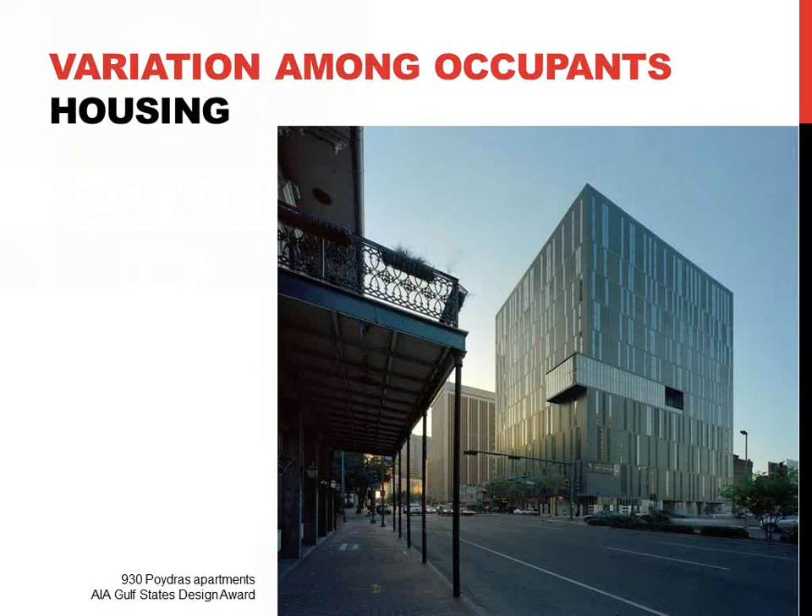Well, here we have a 250-unit apartment building. So it's one building envelope, one building mechanical system. But every unit inside this 250-unit apartment building has its own little heat pump. You have a neutral water loop that goes through the building—you dump heat into it when it's too hot in an apartment, and you suck heat out of it when needed.

These are two interns that worked with EDR last summer, and this was the gatekeeper of that building. We became friends—we found that she had a weakness for smoothies from Jamba Juice on the ground floor. So once a month we'd go visit Kaylin, and we'd make a smoothie, and she'd leave us the key to the electrical rooms and go drink her smoothie, and we'd run through the building, pick up a flashlight, read 250 meters, and then log the data.

And from this, we can start to acquire real information. We don't know who the occupants are, so their anonymity is preserved, but we get data. This is a histogram of the energy used per square foot of all these apartment dwellers. So 60 of the apartments use about this much energy per square foot, and there's 1 or 2 out here and like 5 over here. I don't know what they're growing inside this apartment—it's pretty good, right? And these people might just be people coming and going a lot.

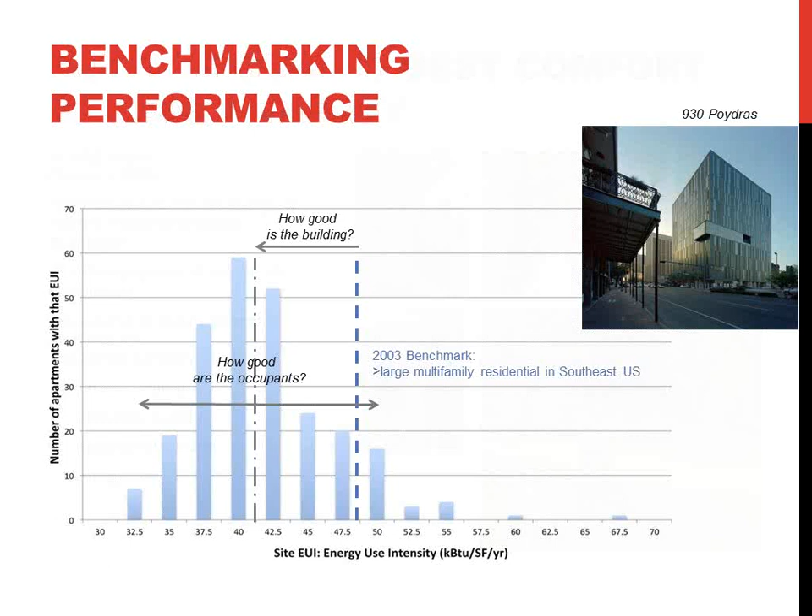So I got really intrigued with this power of just looking at enough stuff to learn things. I told this story: I'd been teaching a little seminar at Tulane, and I went and had a muffuletta sandwich—a sandwich we have in New Orleans—with the guy who for 20 years had been teaching the building science course in the architecture department. We chatted for about 40 minutes, and then he said, 'You could teach my course. I could get out of teaching it. You could teach my required building science course.'

I had just written a grant to get some widgets from NCARB for my little seminar to consume in a few buildings. But instead, what I had was 64 students a semester. So we made 16 teams of 4 students each, and assigned them a whole bunch of different projects. They did labs every Friday.

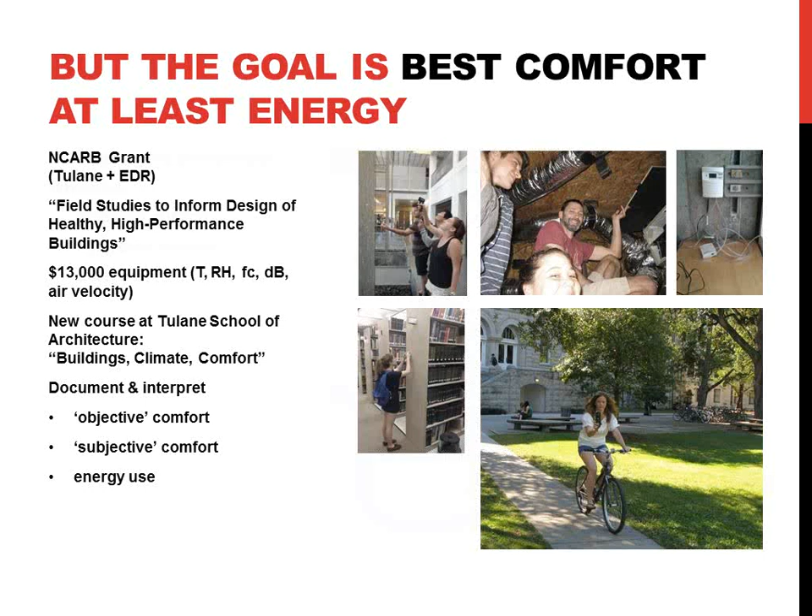This is a girl riding her bicycle, judging thermal comfort while studying airflow at a different metabolic rate. Here they're looking at a water wall and measuring the radiant temperature off buildings. Here they're instrumenting a library for occupancy patterns to understand potential savings from occupancy sensors. Here they're instrumenting an enthalpy recovery ventilator to document performance, and so on.

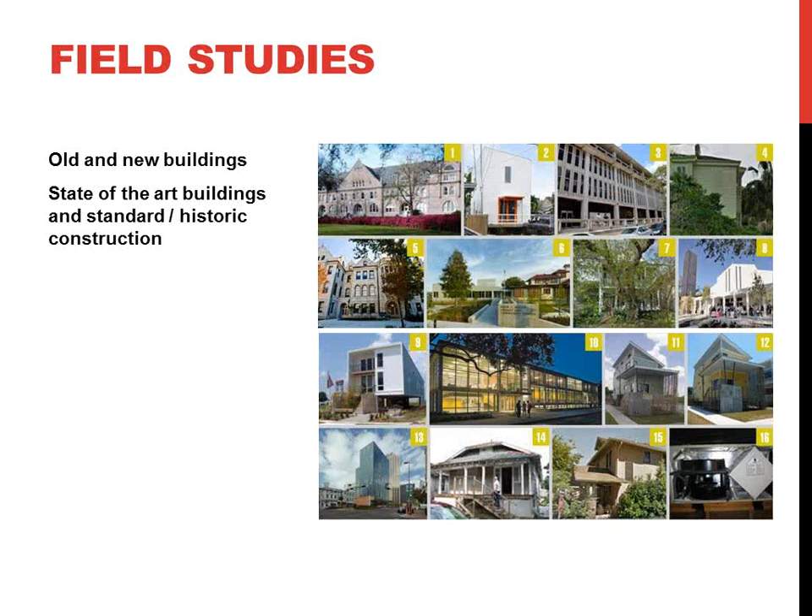So they picked study sites all around New Orleans and the rest of the city—all different kinds of buildings: single-family houses, big institutional buildings, libraries, traditional homes, state-of-the-art apartment buildings, and so on. They do studies where they look at the numbers and psychrometric charts. They can all spell—architects can all spell the word psychrometric.

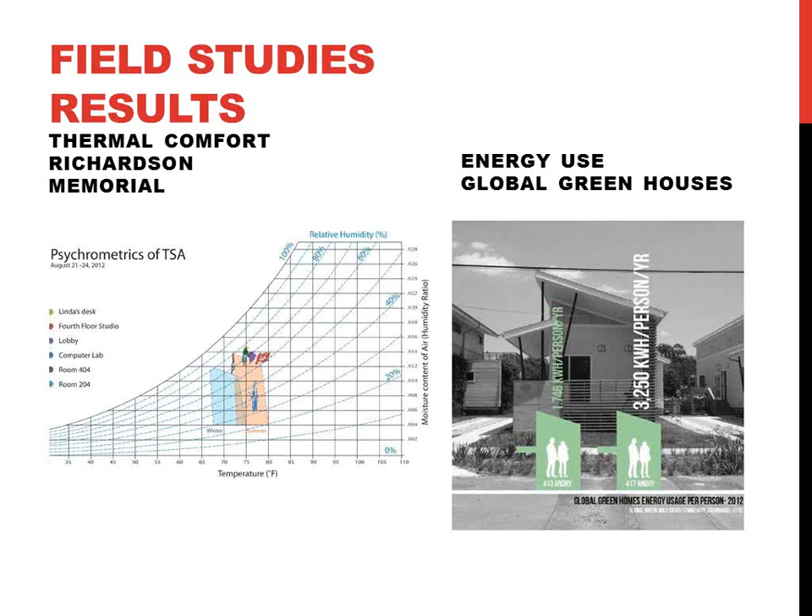Psychrometric charts documenting comfort, also documenting these 4 identical homes built by Global Green. Two of them have the same occupant pattern—a husband and wife, similar jobs, similar incomes—and one uses twice as much energy as the other. And then, well, this is the old joke: anecdote is not data, right? But we learn them from anecdotes.

So they used Facebook to do comfort surveys, sending out studies of the architecture building itself, asking people about their thermal comfort, and people use those interesting acronyms. In fact, you learn a lot from that, and trusting users and trusting occupants teaches you so much about how the buildings are really working.

From that, one of the buildings they studied was the New Orleans Bioinnovation Center. Now, for building a laboratory—every dot on this chart is 1 hour of the year. This is temperature, and this is the moisture content of the air, with lines of relative humidity. This zone is when you're comfortable in summer clothing, and this is when you're comfortable wearing more clothing in winter-style clothing. Passive strategies can, in theory, apply around here.

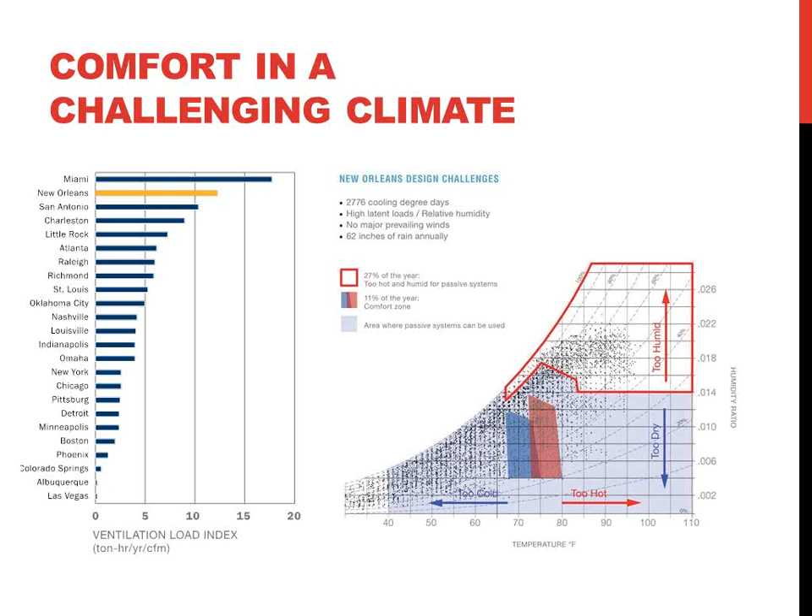You can either keep from solar heating, or do evaporative cooling when it's drier—warm but still dry—but once it's hot and humid, nothing you can do. This is the energy it takes to dehumidify if you have something bringing in 1 cubic foot per minute of air continually all year long. Here's how much energy it takes to bring that into a neutral temperature and develop 50% relative humidity.

The only worse place to build a lab is Miami, because labs move lots of air to keep people safe. So when we did the energy model for this building, the New Orleans Bioinnovation Center, if they did the typical thing of running 12 to 16 air changes per hour all the time, based on the worst case of what chemicals you might be using in the lab, this is how much energy they would use.

We realized that this is a center where everybody can rent a little lab space for their little startup. They all have different needs, so there's a diversity of needs. What we wanted to do is let people set their own ventilation policy in consultation with their own safety officer.

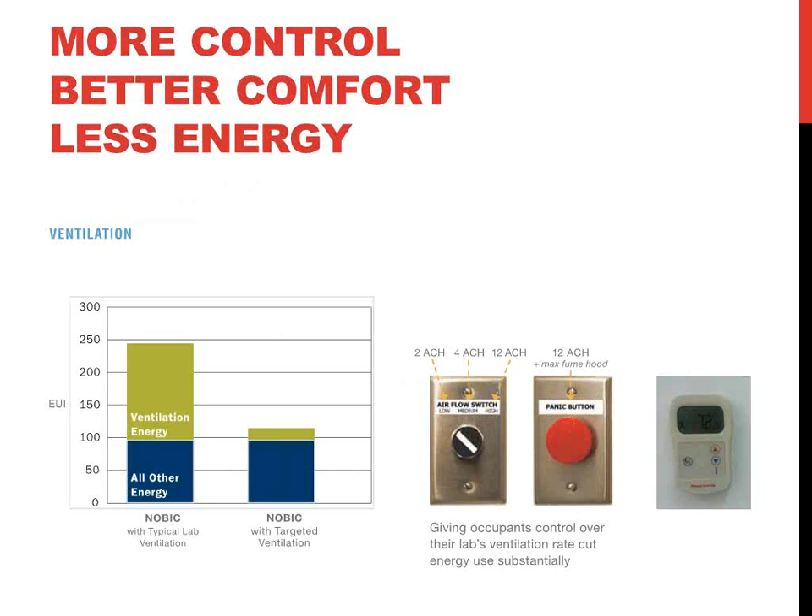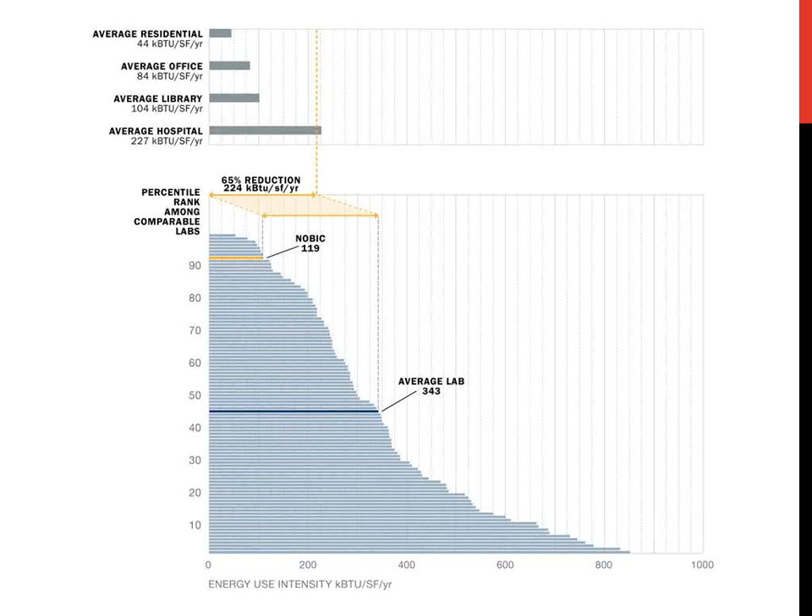Here's the energy used per square foot of typical homes, offices, libraries, hospitals. Here's the average lab. And here's the measured energy used in the New Orleans Bioinnovation Center - which is in one of those challenging climates. That's because we're paying attention and giving control to users.

We did comfort surveys working with the students, and we found an amazing fraction of people are actually comfortable. But we were interested to find a place that was cool - we knew what was going on there. There was also one lab reporting that it was too hot.

We went to the building management system, and Darnell logs into it. He says, they can't be too hot - we shut off the reheat valve on their air handling units. Look, it says so right here. And we went into the lab, and it's too hot.

There's a very successful startup that kept adding more and more equipment, so we assumed it was the equipment. In fact, they told us it's because of all this equipment - but we're growing, we need more equipment, so we have to go add more air conditioners to our unit.

We picked up the radiant sensor, aimed it at the air outlet, and measured it - it's dumping 85-degree air into the room. Darnell says, that's not possible, the control software says the hot water valve is shut. The answer is no - the building management system had issued an order to the solenoid to close, and he took the order he had issued as the reality of what was going on in the lab.

They found that the valve was stuck open, so it was always heating, and the space was uncomfortable. So it wasn't that people were being greedy and demanding more cooling than they had the right to - it was that the system was malfunctioning.

Despite the high level of automation, you can imagine we needed a sensor to measure the flow in that line or something. But in the end, people are really cheap sensors - they'll tell you something's wrong. Building feedback mechanisms, connecting the computer world's data with what people actually say about comfort, is what's so exciting about the work I'm seeing at the IDL. That can get you to real ranges of savings.

So this is the closing slide. Architects frequently talk about their designs as their baby. If you think about the development of any design, the first phase is conceptual design - concepts. So we think of it: our buildings are our babies, and conception, the moment of conception, is often a very pleasurable moment.

Instead, if we stop thinking of architecture as a one-night stand and think about it more like a long-term relationship, it opens up a whole different way for how buildings are built. That's what we're trying to do as a firm - though we have no idea how to get paid for it.